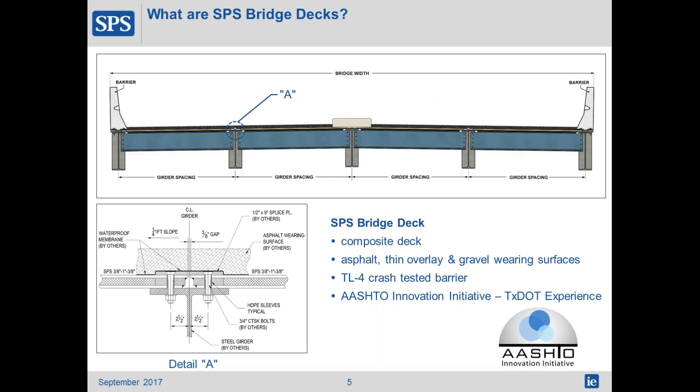Typically, SPS spans between 5 to 8 feet and are manufactured in lengths between 20 to 40 feet. This gives weight in the zone of 37 to 51 pounds per square foot. Of course, SPS can be customized for any particular application depending on the design criteria.

This table contains a side-by-side comparison between concrete and SPS deck. As mentioned, it's up to 70% lighter than concrete, can be up to 2 inches thinner. It comes completely prefabricated in the shop with the appropriate coatings, bolt holes, and penetrations ready to be assembled on site. When properly designed, detailed, and maintained, SPS can achieve a 100-year design life.

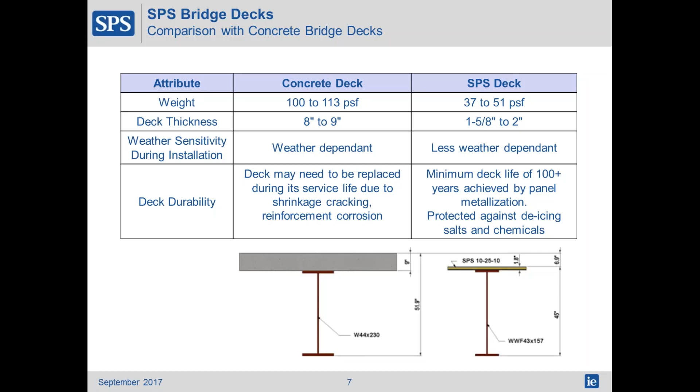The elastomer core was developed in partnership with BASF, who have used this particular elastomer in service for over 60 years. In the lab, they accelerated the deterioration of it and saw that we can achieve a 100-year plus design life. Of course, with any steel product, it must be properly maintained and detailed.

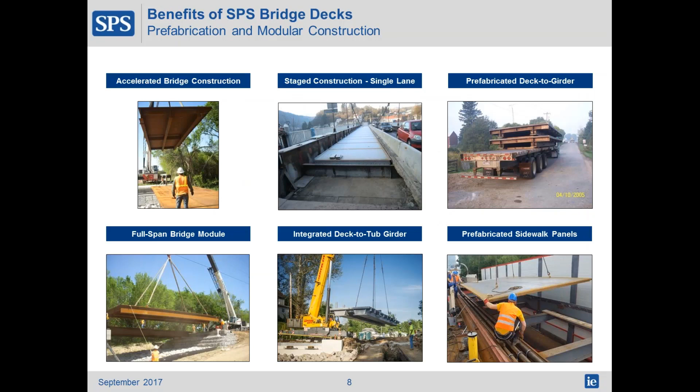The weight and prefabrication can be leveraged to create large prefabricated modules which are fit for ABC type construction. They are delivered to site on trucks efficiently, can be erected using small equipment. It's completely weather independent and can be assembled using single trades and all steel construction.

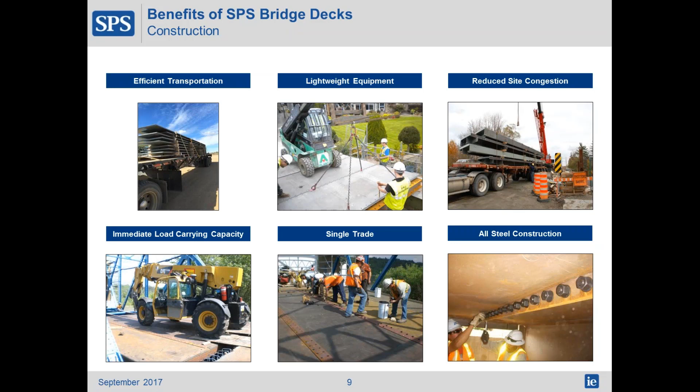A variety of wearing surfaces can be readily accommodated, as well as steel curbs, drain inserts, expansion joints. Drainage in the longitudinal and transverse directions can be accommodated, and of course a variety of corrosion protection systems consistent with steel designs can be accommodated.

SPS has undergone extensive testing to characterize its performance over the last 20 years. In particular for bridge decks, the crash performance, fatigue, and dynamic properties are all important for designers. We've found through testing that SPS is able to achieve at least a TL4 performance level.

The polyurethane as well as the bond to the steel plates were found to be fatigue insensitive, and any fatigue is governed by the parent plate and connection details, again typical to any steel bridge design. We've also done live load in-situ testing on the bridge deck and found that the dynamic impact properties are consistent with that of AASHTO. All load reports and assessments can be made available to you.

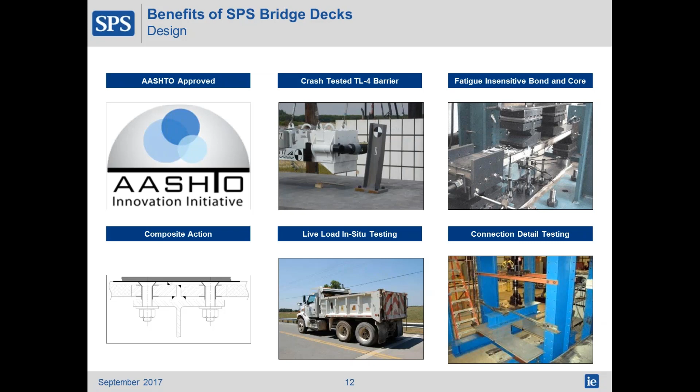This picture is a side-by-side comparison of an SPS deck and a concrete deck, where pendulum tests were conducted by the Texas Transportation Institute back in 2005 to evaluate the performance of SPS decks.

What I'm going to show now is a video of a pendulum test that was conducted.

In this case, the SPS deck remained undamaged, and it should be noted that the thickness was less than 2 inches. The plate you see in front here is a faceplate. Compare this with concrete, where we can see rupturing of the concrete deck surface.

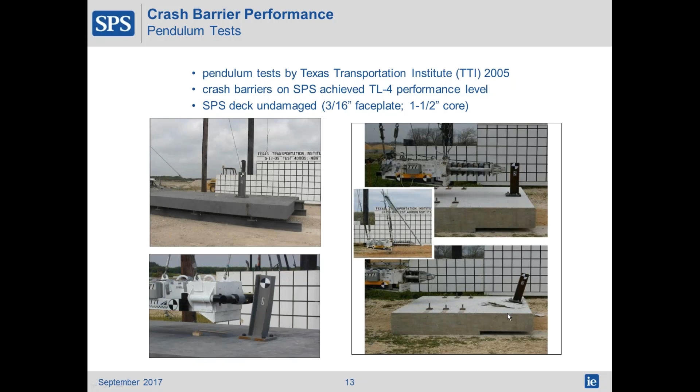So that's an overview of SPS deck. Now to dive directly into the project, as mentioned by Doug, this was part of an AID demonstration grant, which was awarded back in 2016 for the replacement of this existing 38-foot span bridge with a press brake steel tub girder and SPS deck.

Due to the low-lying area here, extensive corrosion occurred to the bottom flanges and at the abutments of the existing structure.

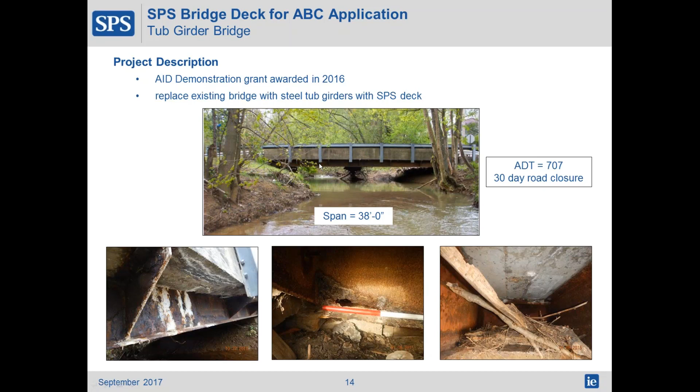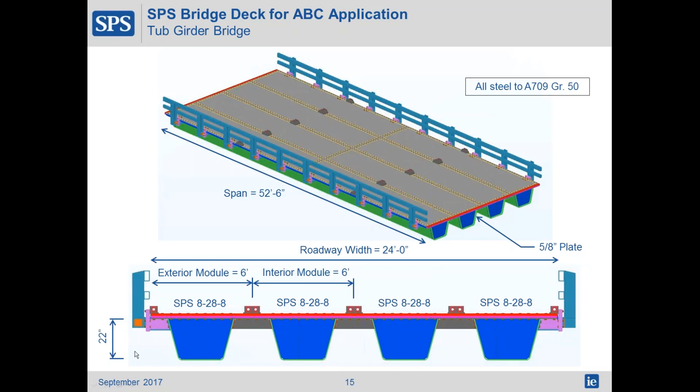The tub girder was press braked from a 5/8 inch thick plate to form a 22-inch deep tub girder.

Combining the exterior and interior modules, they were pre-attached in the shop as shown in the picture here. This also has immediate load carrying capacity as there are no concrete closure pours required between the modules.

The overall depth of the superstructure was minimized by the efficient tub girder design and the thin SPS deck. A 100-year design life was achieved using a spray metallization on the SPS deck panels, while all other superstructure components were hot dip galvanized.

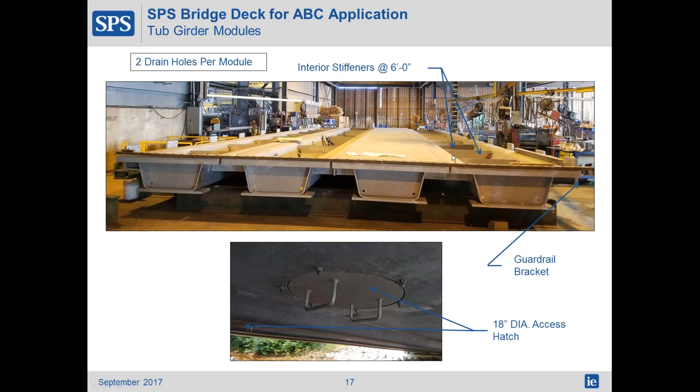This is an assembly of the bridge in the shop with the top plate SPS deck removed. As you can see on the exterior girders, there are stiffeners located at every 6-foot center, which coincided with the location of the post. These may or may not be required depending on site-specific conditions. Each tub girder had 2 access hatches as shown in the bottom picture for ease of inspection. Additionally, there are drainage holes located along the bridge as well.

This is the erection sequence, which comprised of combining 2 modules in the shop with the guardrails pre-attached, lifting beams already in place, and erecting the 2 modules and assembling on site. Each module in this case weighs approximately 31 tons. Had this design been done in concrete, the modules would have been twice as heavy as that of the SPS module.

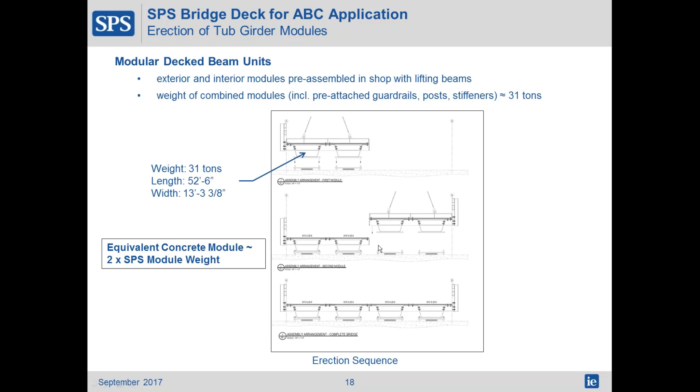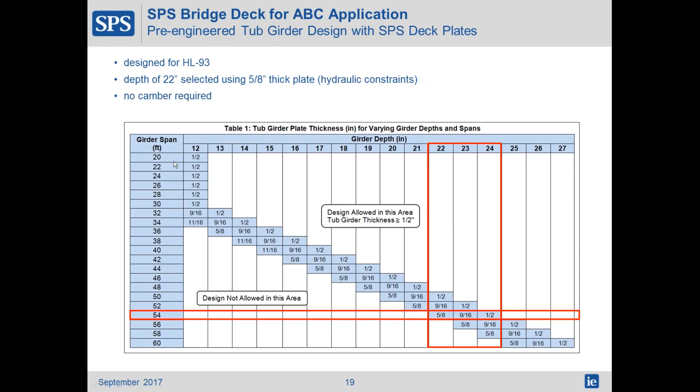The SPS deck, as well as the tub girder, were designed for HL93 loading. Due to the hydraulic constraints at this site, a 22-inch deep tub girder was specified using a 5/8 thick plate. This is a selection table that can be used to determine the thickness of plates based on the girder as well as girder span. Due to the light weight of the deck and overall system, no camber is required.

A TL2 guardrail system, as per ODOT standard, was readily accommodated using an exterior bracket as shown in the pictures. Alternatively, a TL4 system, which is a deck-mounted option, can also be accommodated.

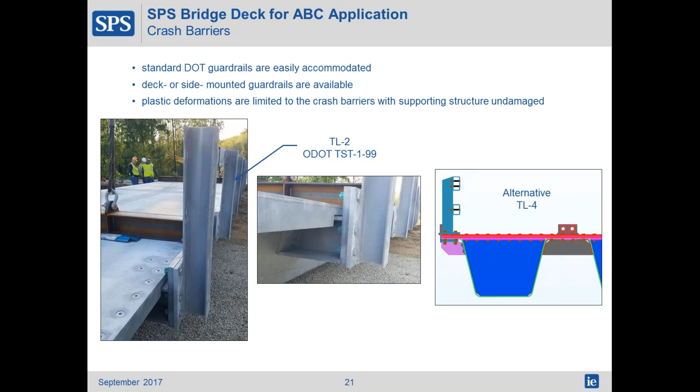Combining the entire project, this is the final delivered module to site with SPS deck bolted to the press brake tub girders, the bearing plates, splice plate for the longitudinal connection, expansion joint, as well as the guardrail and lifting beams are all ready to go. We had excellent match fit and dimensional accuracy.

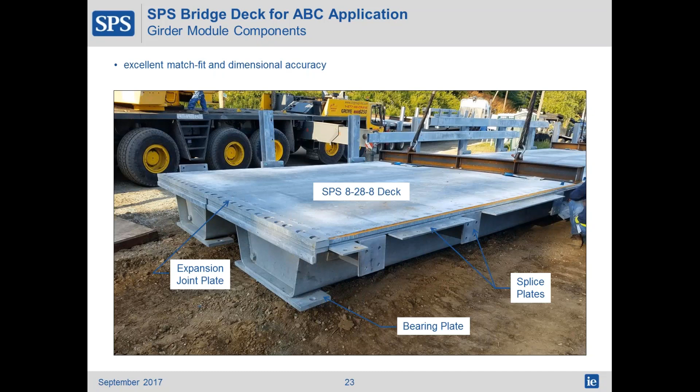This is the last slide here, which shows a video of the erection of the bridge.

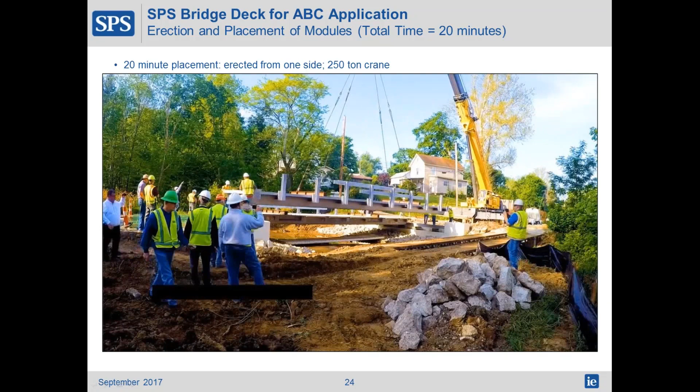As you can see right there, each module was placed in 10 minutes flat, erected completely from one side using a 250-ton crane. Now I'm going to pass it over to Dave Cox at Maico, who will discuss the fabrication aspects of the bridge.

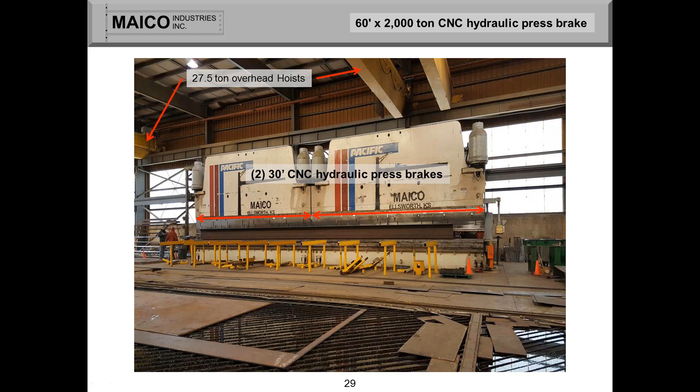Up above you can see we've got a couple of 27.5-ton overhead hoists, and not pictured, 40-ton hoists and some other smaller hoists as well. So very capable of handling these large components.

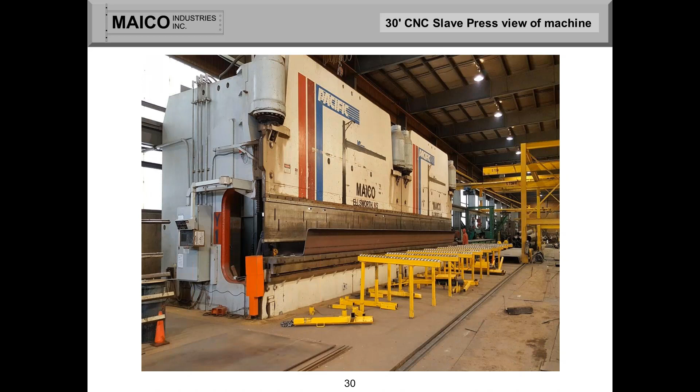This picture here is just an additional picture of the press brake from the slave end, and you can see it's during the forming process of one of the tub girders. By the way, the bends that you see pictured are roughly 76 degrees, and we utilize a 2.5-inch radius punch to achieve those types of bends with this material.

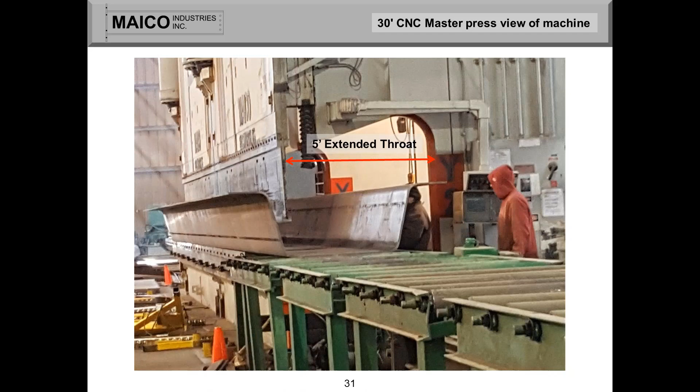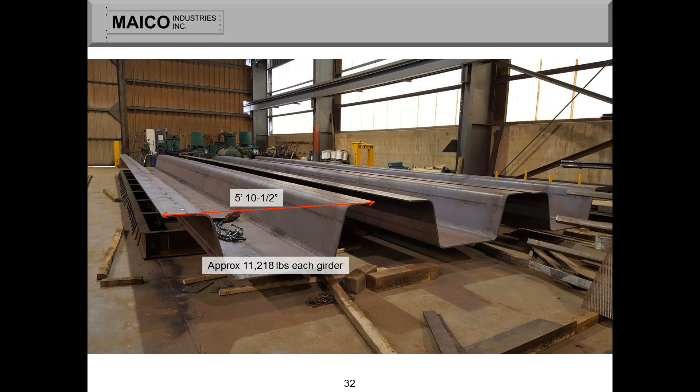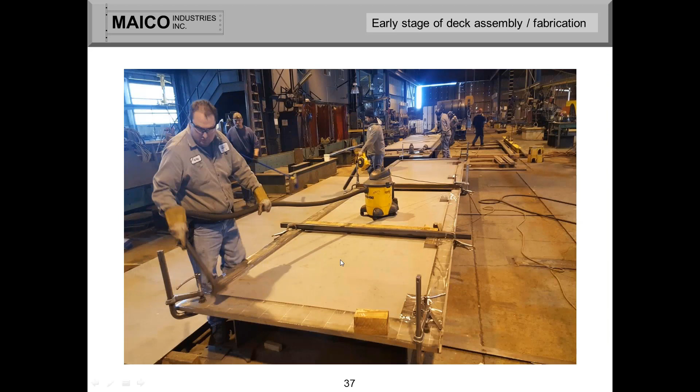This picture here is kind of a busy picture. It shows our steel fab shop area with our highly trained certified welders operating brooms, wet vacs, and leaf blowers. That's not something common to our industry, but in this case, for these types of decks, it's very critical for the interior of these decks to be clean after the SP6 blasting surface profiling is complete.

The polyurethane core materials that will be injected within the deck cavities later in this process will have to have good adhesion, so the interior surface plates of those decks have to be really clean.

Also in the picture here, you can note various clamping devices that we use on the ridge frame and on the outer frame bar to ensure that any gaps are very minimal. The bottom plate is 5/16 thick, the frame rail is 1 1/8 inches thick, and then we cap that off with another 5/16 thick plate.

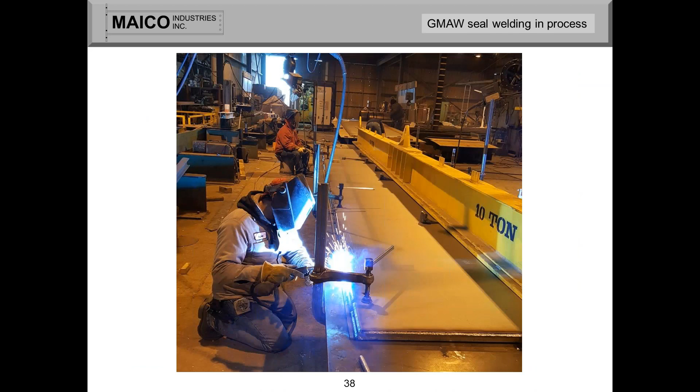The next photo here is one of the deck with the cap plate on now, and our welders are busy welding. We utilize gas metal arc welding to seal weld these deck panels, and in this case we used 1/16 diameter metal core wire to complete nearly 130 linear feet of fillet welds needed to seal each one of these decks prior to the injection process.

This is done prior to the injection process, and I should mention this is an E70 C series wire electrode certified to both AWS and CWB standards.

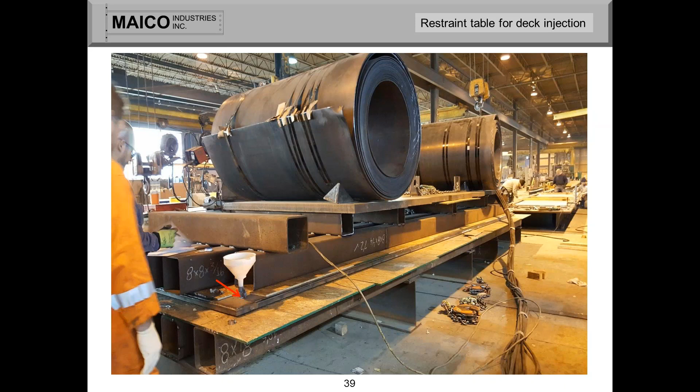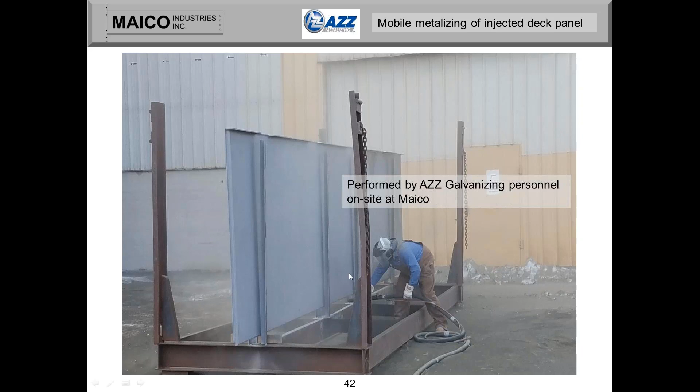The next slide shows after the metallizing is complete, we move the panels back into our shop. The next step is the CNC drilling and counter boring of the deck holes.

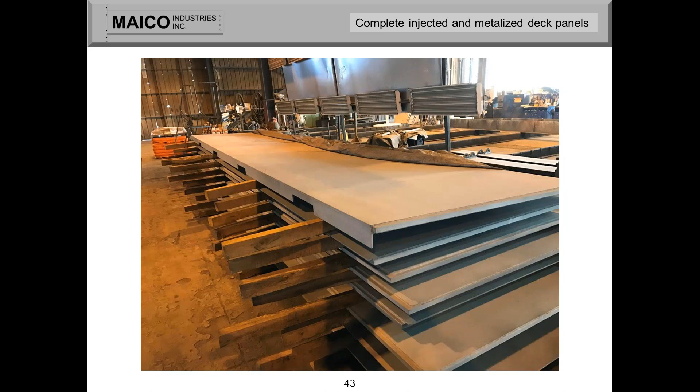I should mention the deck holes themselves. Some may ask, why weren't they drilled before? Well, during the injection process, there's always the possibility of seepage and flatness being an issue. So it was specified to not drill the holes until after the injection process had been completed.

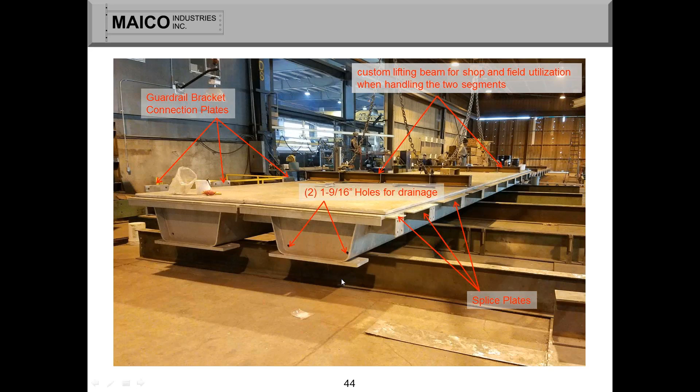The next photo shows, once again, various things in process. We can see this long bar that has not been galvanized yet. There's a couple reasons why we did not do that, but primarily this bar is drilled, and the bolts go through these holes in the bar that bolt into the end of these tub girders, which we subsequently threaded as well.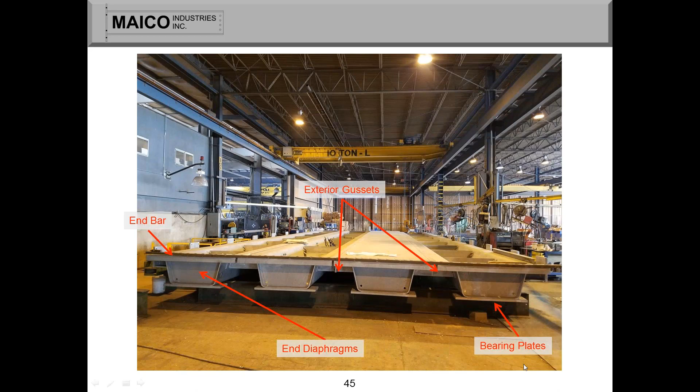And then you can see some of the end diaphragms and the bearing plates as well. This slide shows more of the drilling and counter boring of the step deck panels as they're staged on the tub girders.

This is just an additional picture with some more of the deck panels put on. There's a lot of match drilling being done through the deck panels into the tub girders, and counter boring of the tub and deck girder holes.

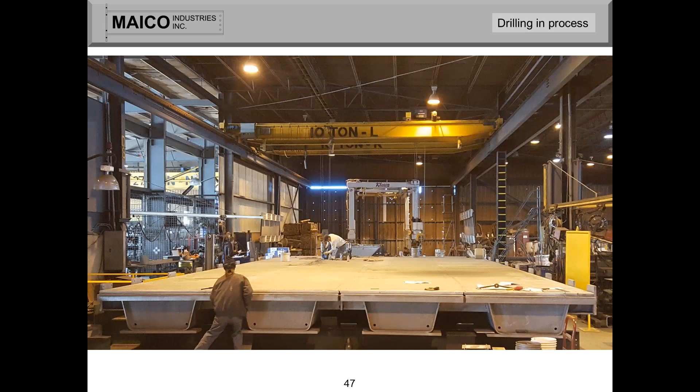This here is a good summary of the amount of drilling, counter boring, and holes. I should mention too that all these holes that are counterbored with the bolts that are assembled also have a plastic sleeve inserted for various reasons.

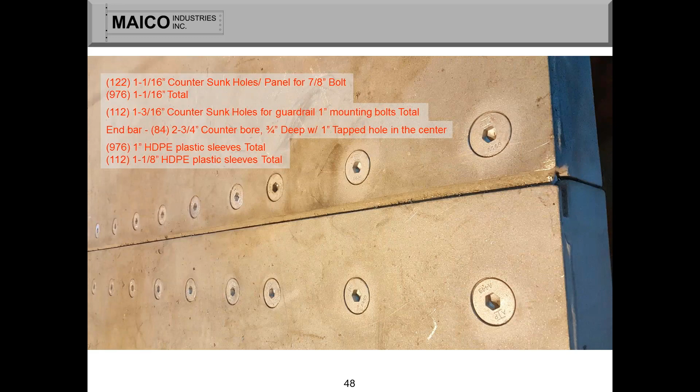The next slide is basically the finished product as it's being loaded out for shipment to U.S. Bridge, where they're going to be doing their guardrail installation and final prep and inspections before transporting those tub girders onto the job site.

And I should say U.S. Bridge was really a phenomenal partner to work with throughout this entire process. We appreciated that. Here we can see load number 2, which weighs a bit more than load number 1, primarily because of the exterior gussets there that will help splice to the other tub girder.

I should also mention that MSS Transport was a great partner in this. They delivered both bridges without any issues and did an excellent job shipping these components to the job site. So I believe that completes my part of the presentation.

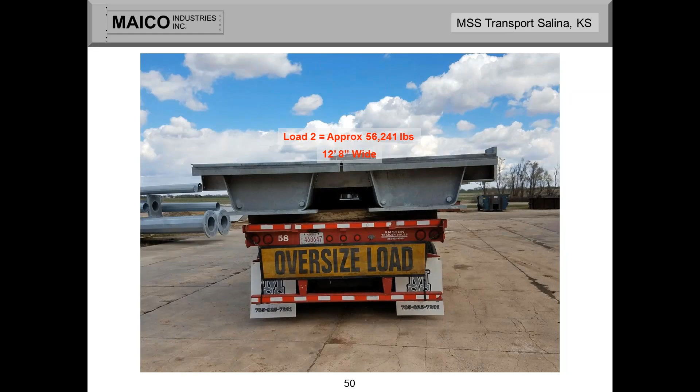Hello, this is Doug. I'm going to give you a little insight into the project. I'm going to flip through some slides rather quickly, but I think they're very important to the project, that's why we kind of left them in here.

You may ask, why does this have to do with ABC? Well, the reason is because it shows the preparation and work that the contractor U.S. Bridge did, how neatly and quickly they handled all the stormwater, and how they handled the different sites of the structure. For those who have never torn apart or built a bridge before, you'll be able to see the insights of it. While I'm flipping through these slides briefly, I'm going to have Rod LeMaster speak again about what happened here on the job site.

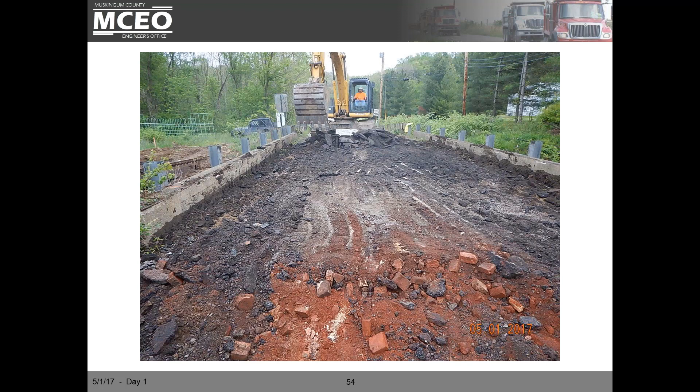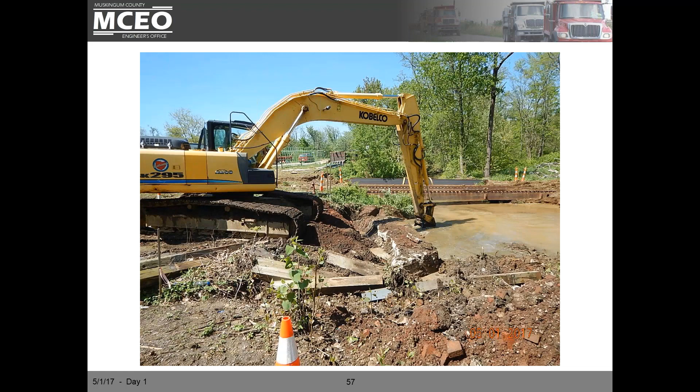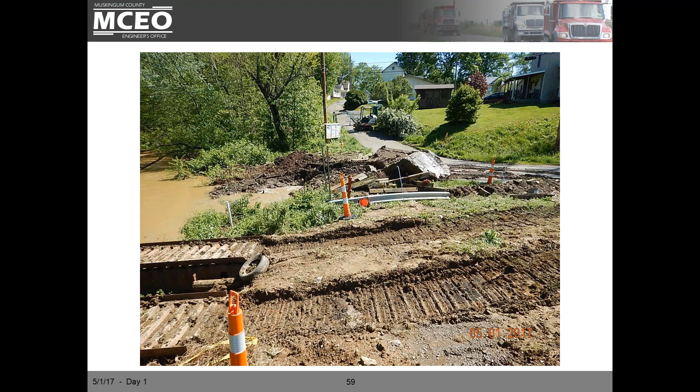The existing bridge was pulled out. We had a little bit of flood water at times. The backup of the water really created a lot of mud, a lot of issues. And then there was a 30-day bridge closure. It was a real important issue with the contract.

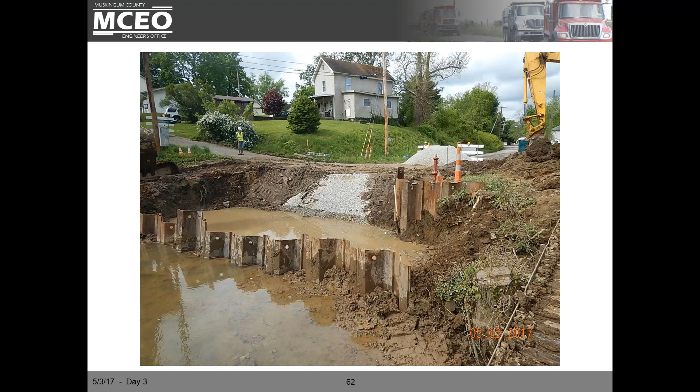So we cast all of the abutment concrete prior to the delivery of the bridge. The abutment wing wall design only allowed 1 inch of clearance, and we were concerned there would be too little room to swing the bridge sections into final place, because there were some underlapping plates, and we wanted to get it to underlap the plates plus fit over the anchor bolts.

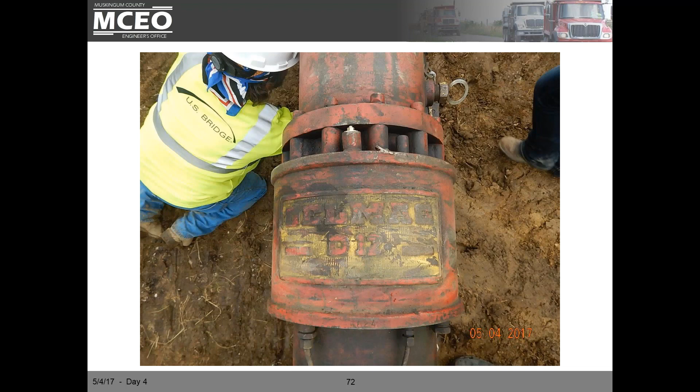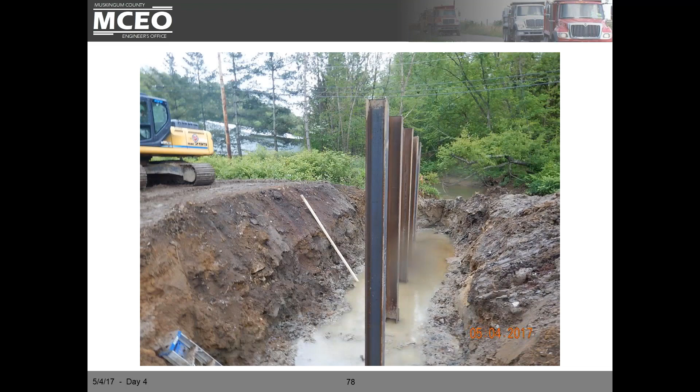So to ensure this fit up, we actually set the bridge on top of the bearing box, and once we got the bridge sections bolted together, we used a jacking system with a manifold system that lowered all of the sections at the same time right down on top of the anchor bolts.

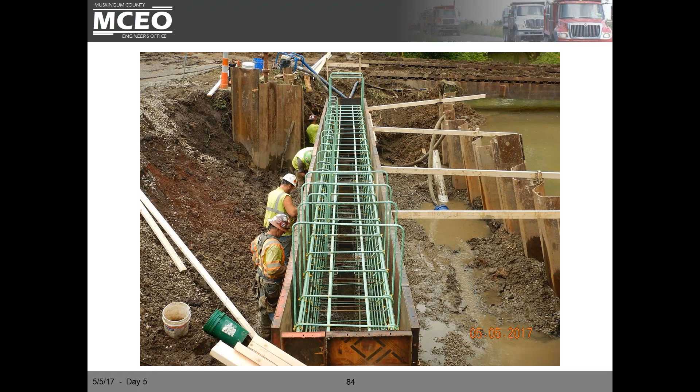Of course, the crane we had for setting this was a 250-ton hydraulic crane. We set everything from one side, one spot.

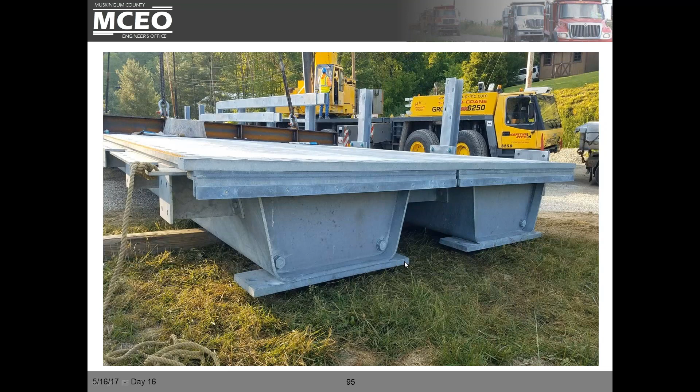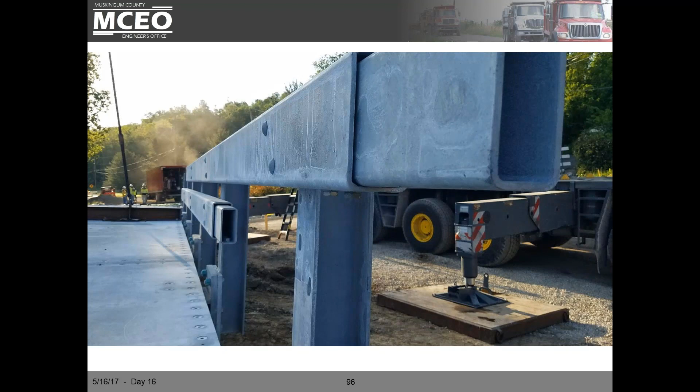This picture shows the guardrail assembly put on the structure, the tub, as much as we could for fit up, to help expedite work in the field.

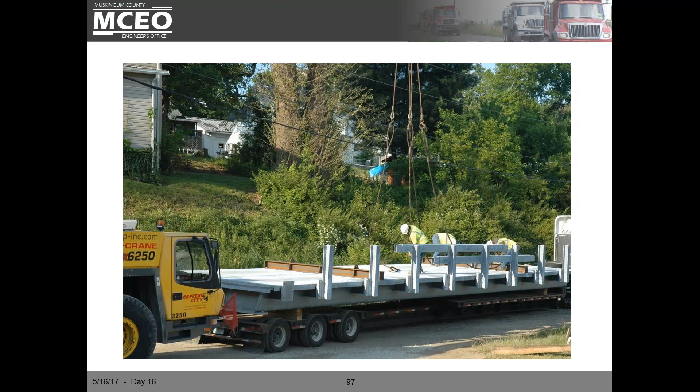So here we are. We've seen the video. We're getting ready to pull the tub in the two sections off of the trailer to be able to set it. Swung those into place seamlessly.

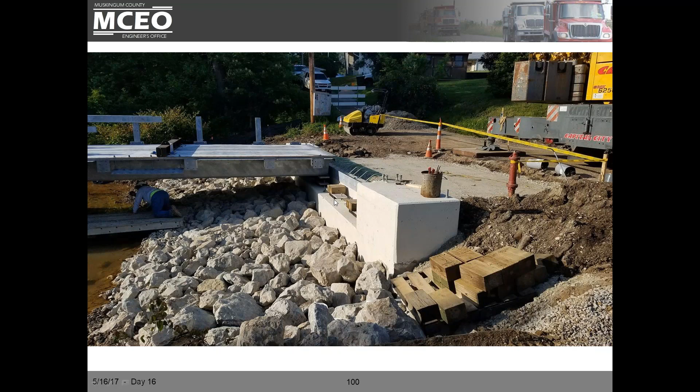Well, not everything of that massive weight is going to go together just exactly right. So what we're able to do is set those on, be able to shim them just a little bit, get the tubs to match together in the field, do the bolting, and then use the diaphragm system to lift the structure in one piece, pull out the wood blocks, and set that directly down on the bolts in order to bolt the structure down.

Now, this is a pretty good picture of the stream here. Why did we pick this particular location for this tub? 100% of this bridge is galvanized - the spray metallizing of the deck, the galvanizing of the tub - because this stream has very high acid mine runoff, a very low pH, and for that reason we wanted to protect it for the future.

This location is quite a ways away from my shop in our county. Unless I specifically want to drive there, I don't normally just drive through this particular location.

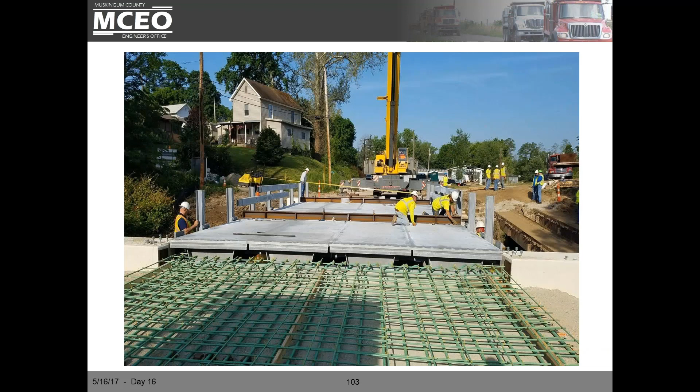There's another really good still picture of setting the second section down. Here we're putting it together, and the anchor bolts are going in on the very first day. Day 16 was when we were setting the structure and bolting it together. Day 17, the structure is already together, set down in its final location. So in a day or a day and a half, they have this machine delivered, bolted together, set in place, and ready to continue with construction.

This picture basically shows—and you say, well Doug, why are we showing concrete? This is an approach slab, but we have to figure out, with the tub, how to marry the tub girder with the SPS deck to the existing abutments and have a smooth transition on the roadway. So this detail here basically shows a sunken approach slab.

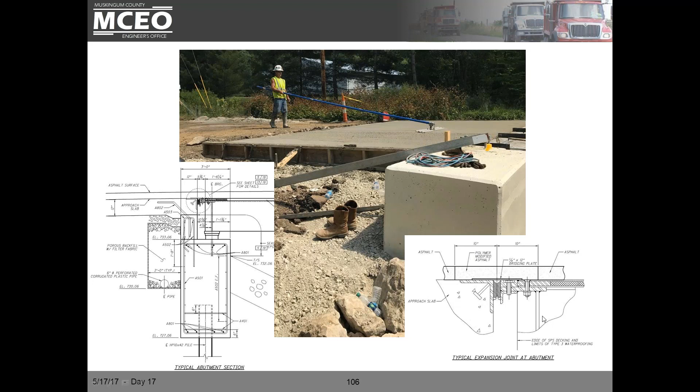It will have asphalt on top of it, you'll see later. But this also shows you the expansion joint—how do we account for the expansion? This plate right here that you see, you'll see it again, just a little dirtier, covered with some asphalt. But that's what we were doing in this picture, showing that we have a sunken approach slab so we can have that termination from the abutment of the structure to the approach slabs.

This picture just basically shows that we're getting ready for roadway. And this is kind of my call—one of the things I was concerned about, not that I didn't trust anybody, but I'm kind of sticking my neck out with this project. If it fails, it sure makes me look bad in the county. Not that I ever thought it would, but having this deck being galvanized, or metallized I should say, I wanted to make sure we had a very good bond between the asphalt surface and the metal deck itself.

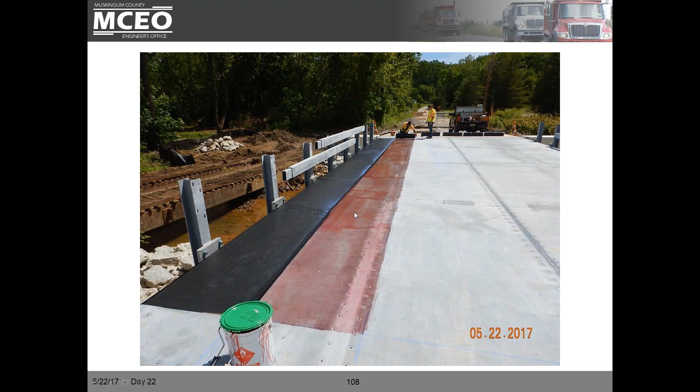So what they're doing here is applying a primer. We've got a sheet type 3 rubber membrane on top of this, and it'll become pretty evident in the future slides why I particularly wanted to go that route. This is the end of the roll. This is our membrane, or waterproofing, and again shows your expansion joint, also shows your typical abutment detail for those of you that need that.

We're starting the asphalt process. They put this in two lifts—we had a base and a top, so we're going to go ahead and add our base. Then we're going to skip the sunken approach slab and move to the other side. But look at the dirt, the dust that we're getting right now on top of this slab. If I was afraid of any minute detail at all, I wanted to make sure we didn't have anything that was going to break the bond between the asphalt surface and the metal deck itself.

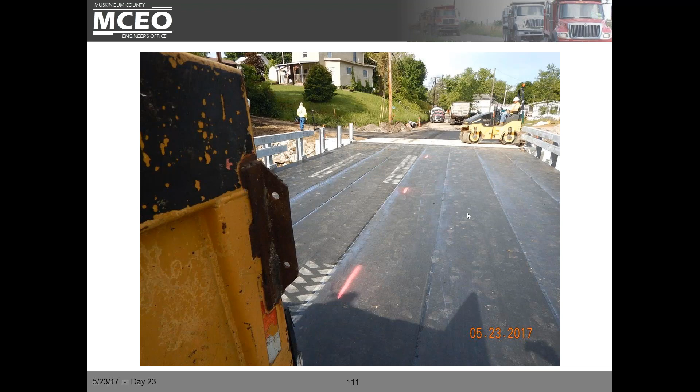By putting in this roll here, the contractor was able to get from one side of the bridge to the other to continue with his asphalt process without stopping the trucks, driving 11 miles around to the other side of the structure. The minute bit of dirt we have on the deck right now is minuscule—once the asphalt is down, it will meld and this will not be an issue. Being so, we're able to have a better riding surface by having the contractor come in, put the surface on the approaches, on the approach slabs itself, and go ahead and get the intermediate on the deck.

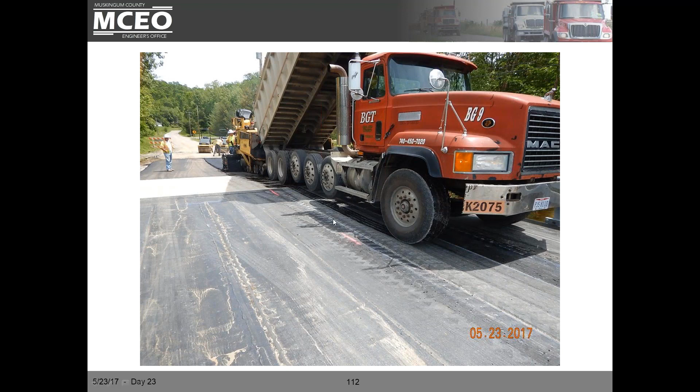Now, granted, this tub does not have any camber into it—it is completely flat. We also do not have any crown in the deck itself, in the SPS panel on top; it is extremely flat. So we have to put a crown in the roadway and the asphalt in order to shed the water. We did not want to have any ponding in this. So here's an inspector actually looking at the crown in the roadway, just verifying what was being done before the asphalt is actually rolled hard.

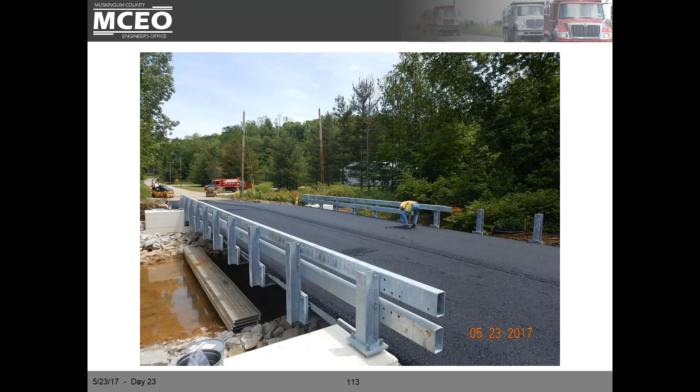Here's a finished product of the asphalt. We're down here on day 23. We've got a few things to button up for this project.

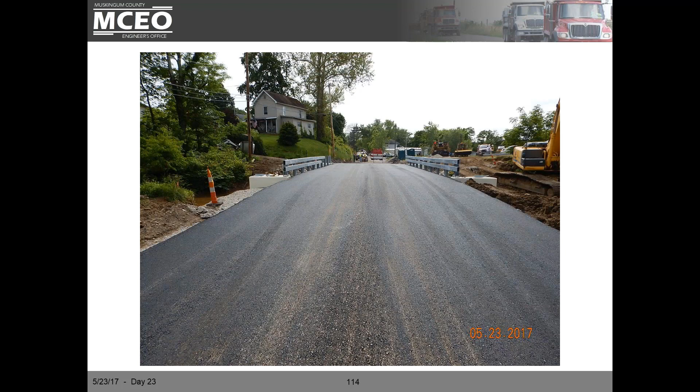Just showing some more approaches. We've got guardrail to put in, going in on day 25. This is a picture showing both ends of the guardrail. It shows that having the tub girder or any other type of structure isn't something specific we have to change for the guardrail. It's no different with a transition than it shows with any other transition of any other bridge we would assemble.

Now, I talked about a plate a little bit ago that was going to be dirtier, and here it is. This is the expansion joint. Because of the tub, we were not able to use a heat lance to remove this asphalt. If we did that, we might disturb the integrity of the SPS panel because of the urethane between the two pieces of steel. So we saw cut it instead, and it came out relatively easy. They just asphalted the day before it finished. This is the specification on the modified asphalt joint we put in over top of the sliding plate for the expansion.

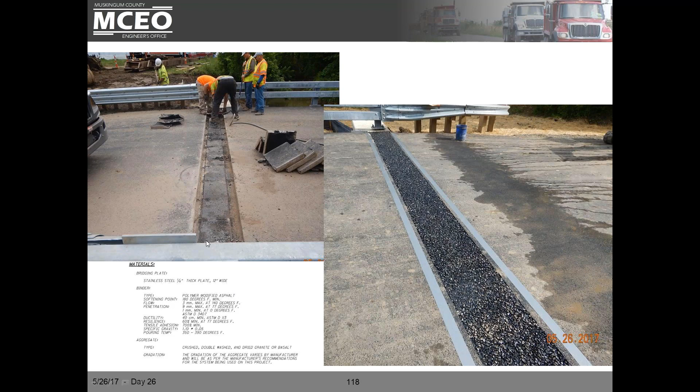One of the things I wanted to include in my presentation is that Muskingum County is very volatile. We have acid mine runoff in our county. We've had a lot of good coal mining over the years, but it left us the byproduct - the pH of some of our streams is very, very low. We also have very rapid streams; this stream will rise very quickly and go down very quickly.

Some issues with our existing structures is that we may get a large root ball coming down the stream, maybe 3,000 to 4,000 pounds. If this was a concrete structure, it beats the heck out of the side of that fascia. If it's a steel beam, due to suction it'll suck that piece of wood or root ball right up underneath there, and it gets stuck between the beams and beats the heck out of our structures. Having this tub structure with its nice flat panel, there's very little void between the two panels. Once it's underneath here, it disappears and becomes somebody else's problem downstream rather than mine. This is a really good reason why we wanted the tub.

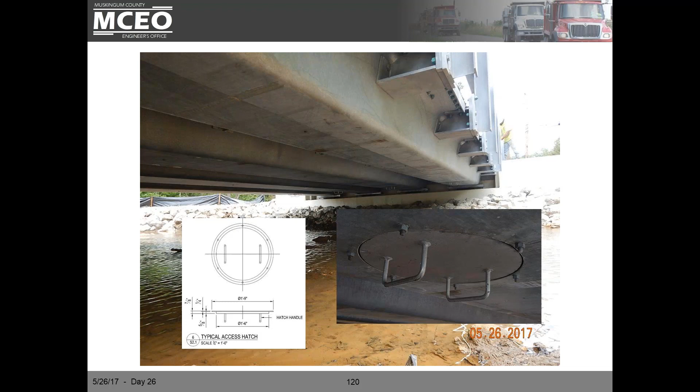Everyone's going to be on their cell phone and drive across and never realize that they just went across one of the bridges that's one of the first ones in the country of this type. And that's kind of what we want, I think, from an engineering standpoint.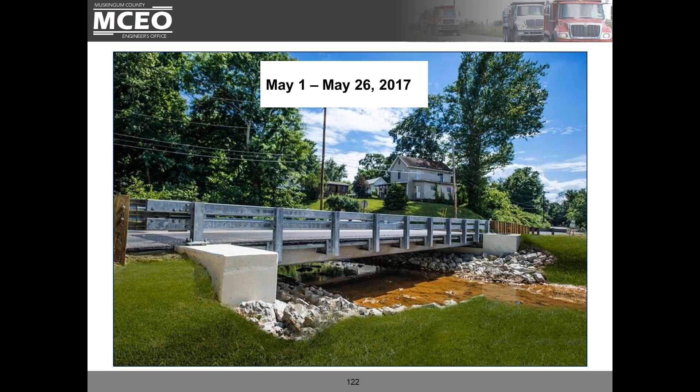That concludes my presentation, I've got one more slide. I do have a lessons learned slide that we can talk about, and I can leave this up if Mary Lou, if you would like for me to do that. Some of the things we came about with is we realize that the substructure is going to be the same, no matter whether it's this bridge or another bridge. It's not something we have to design or change. It's pretty much going to be the same substructure, so nothing there is going to be out of the ordinary or special.

The locals truly appreciated this. We had fire and EMS that said, listen, if we can design structures like this in a 30-day lifespan—and to talk about the ABC of the tub girder itself, when you go back through the slides and look, this was a 30-day closure. We did it in 26 days, or the contractor did it in 26 days. But you think about just the ABC of the superstructure itself—if we had good abutments to set this on, we could have opened this and closed this in probably less than a week, maybe 8 days. So if you go back and look at those dates, fire and EMS sees this as being something out of the ordinary, and something we probably should expect for each one of these projects, especially rural America like we have here in Muskingum County, because we don't have the ability of having near roads to run around. 11 miles to run around a detour in this particular location could mean the difference between life and death.

The risk management was much better considering the tight time frame for the closure of the roadway. The prefabrication allows for more controlled work and better construction. We had to get creative with that expansion joint—we had to marry two different ODOT standards together and get their permission to say, hey, is this going to work? This is federal money being spent inside the state of Ohio, governed by the state of Ohio, for us to use on our local roads. And they were great to work with. So if there's any DOT people out there from Ohio, but also the federal people, I thank you for this opportunity and working with us on this.

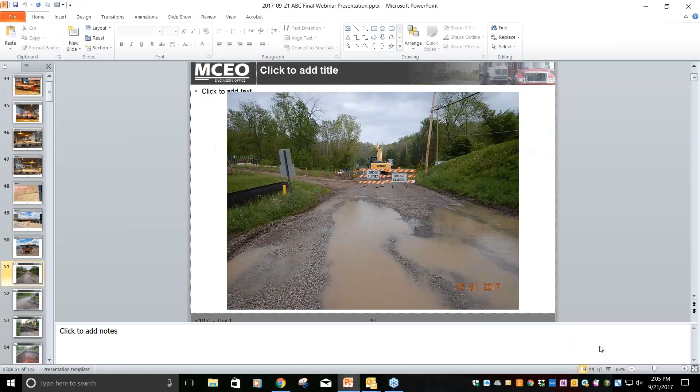And as you're moving towards it, I'll ask the question: was there an attempt to maximize the cut plate width from the 16-foot wide stock plate? And I guess this is sort of also design related as well, and this is related to the fabrication of the tubs, I believe.

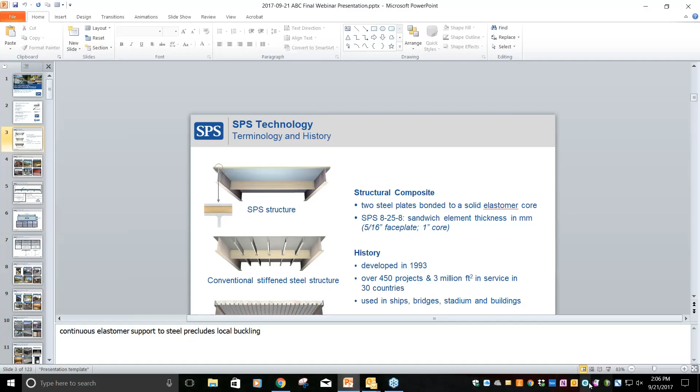There you go, okay. So I'll repeat the question: was there an attempt to maximize cut plate widths from the 16-foot wide stock plate? Typically on these tub girders, from what I've been told, plates from the mill sometimes will have a bit of a sweep in them. And you always have to buy your plates a little bit wider and cut them square so that when you start breaking the tubs, you won't have any oddball dimensions caused by a sweep.

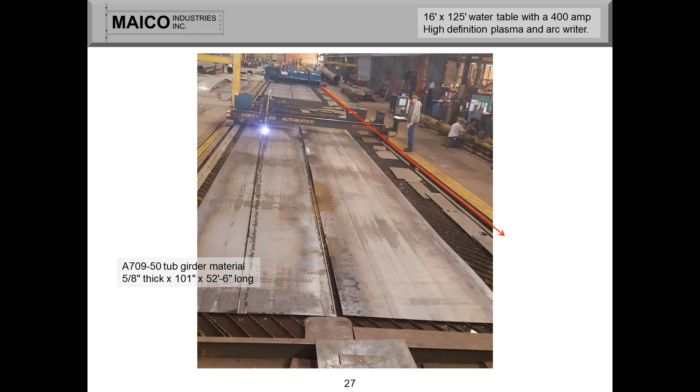Okay, and then you had mentioned that you used a plug weld when you sealed up the SPS deck after the urethane was poured in the panels. Did the plug weld damage the urethane—I want to say urethane, but the correct word is elastomer? No, Ben, that's a standard process that we have done, and it's fine. It's just a seal weld there, so it's low heat.

Okay, and if it did, it would be in such a localized area. Yeah, correct. Okay, and then there was a question about the galvanizing.

Why not galvanize the top and bottom plate of the SPS deck before fabricating the plate? It would cause a lot of damage when you were welding all of that, the perimeters of all those plates. You would lose so much of the galvanizing—it would burn back. So you're better off, once the panel is fabricated, to just metalize the entire section so you have one uniform coating. And this picture shows it right there—there's the bead weld, the perimeter weld, going around the SPS deck.

And I would add that the cathodic protection would be significantly compromised in the heat affected zone of the welding, so there'd be a tremendous amount of repair that would have to be done afterwards. I should also note that the galvanized coating itself would not be very susceptible to adhesion of this polyurethane core afterwards. So the adhesion is much better being directly adhered to the parent material without any coating on it from the interior side of the deck perspective.

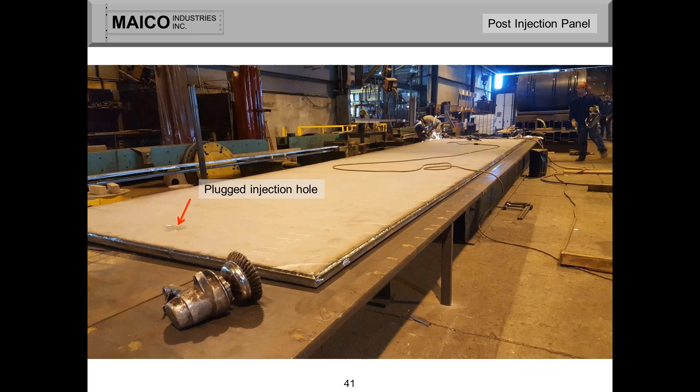Okay, so we really get a lot of questions regarding construction. You mentioned that there was field bolting done between the two units when they were assembled.

Was that all done in one day, the same day the units were placed? Same day the units were placed, the bolting was all done.

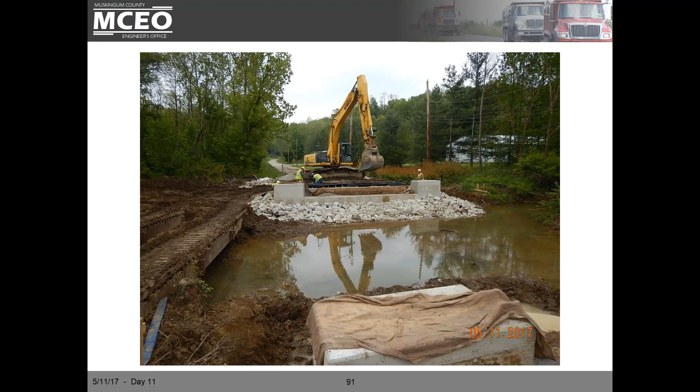The seam weld, there was a 52.5-foot seam weld that had to go right down through the middle of that deck center line. That took a little bit longer, into the next day I believe. The bolting was really fast and simple, but the seam welding took extra time, so that's why it went into the second day.

On the construction side, we're talking about ABC being accelerated to set the structure, but also accelerating the project itself. We still had approach work to do on each side. The contractor poured both approach slabs the same day, the rear and forward abutments, but while working on one abutment, the contractor was able to come in and work on the opposite abutment using his equipment.

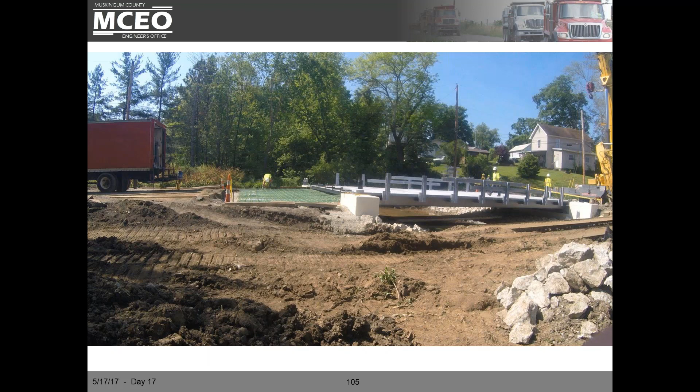This longitudinal joint had to be welded to be sealed through. In the field, rather than bring a crew out to metalize that one joint, we used cold galvanizing. I was also able to breathe easier because of the cold galvanizing, since we were going to cover it up with a sheet type 3 rubber membrane.

Okay, great. We're about 10 minutes after the hour, so I'm going to ask two more quick questions. The first one is, how do you load rate this bridge?

We're actually working with Karl Barth on that. Right now in Ohio we're able to do a visual inspection and go with an engineer's analysis. I've got his testing and we're working with that, so we'll be able to publish that in the future. We talked about it ahead of time, and I'm working with him to make that happen.

Second of all, the machine has never failed the tub. It had over 1 million cycles on it. It had a concrete deck with an 8-inch overlay, 2 mats of rebar steel, and after 1 million cycles the concrete deck completely disintegrated. So the decking disintegrated, but the tub itself was never fazed one bit. So I'm not afraid of that.

Right now we're going with the Ohio DOT, and I'm using engineering judgment on it because in the state of Ohio we don't have a tabular form for the tub since it's that new. But we will have that, and we should be able to share it with you in the future.